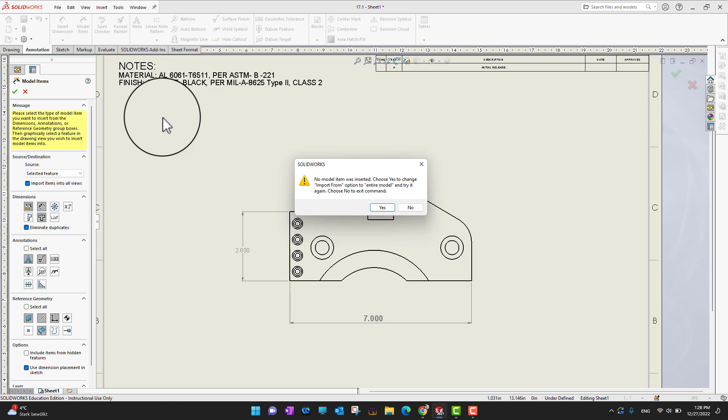Whatever you want to bring or import from the part, you just select it, right click, click the green check mark, and select OK. This way it's going to import all the stuff from the part to our drawing. But we don't need that, so I'm going to press undo.

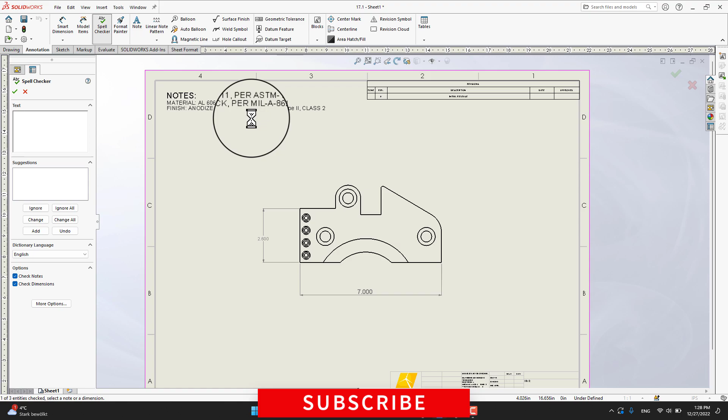The next option is spell check. This command is going to check all the spelling in our drawing. I'm going to select this, and it's going to highlight wherever there are spelling errors. Then I can just ignore all of them.

The next option is format painter. Before going to format painter, let me zoom in to show you. We have two different styles right now. If I like this format, I can select it and then impose that format onto the other dimension as well. So this is how we can use format painter.

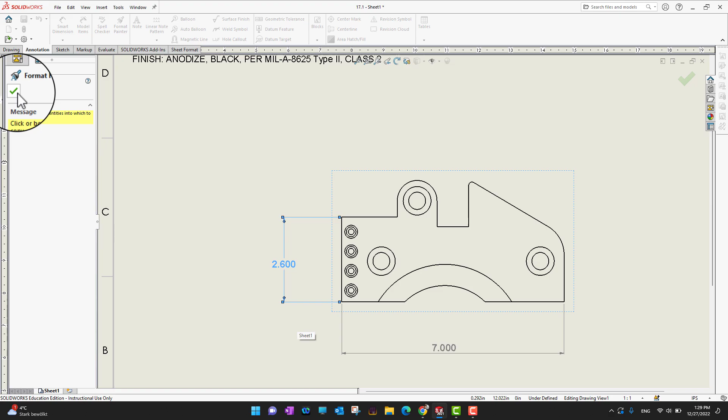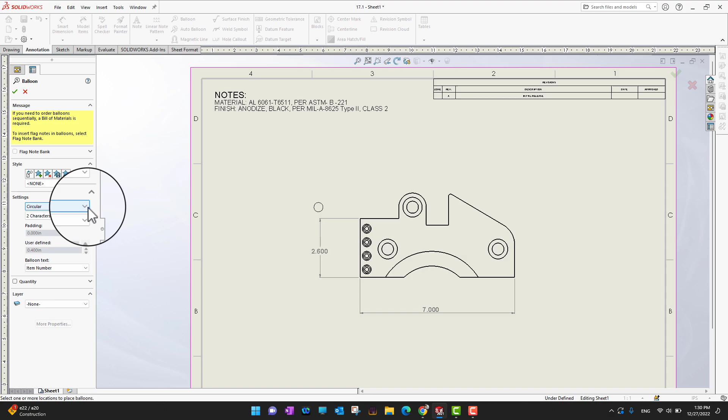The next option is balloons. Balloons are mostly used in the assembly. You can use different kinds of balloons - suppose you want to add a diamond balloon, pentagon, triangle, or hexagonal, and choose how much character and balloon text you want, item number or text, whatever.

So you can just add, and then what you can do is select any edge or wherever you want to add your balloons like this, and then I'm gonna click the green check mark.

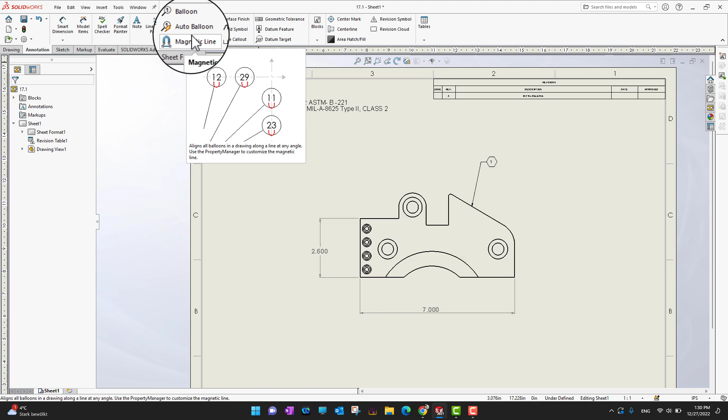Okay, then the next option is auto balloons. Again, this is used in multiple assemblies when you have a lot of parts. So the next option is magnetic line.

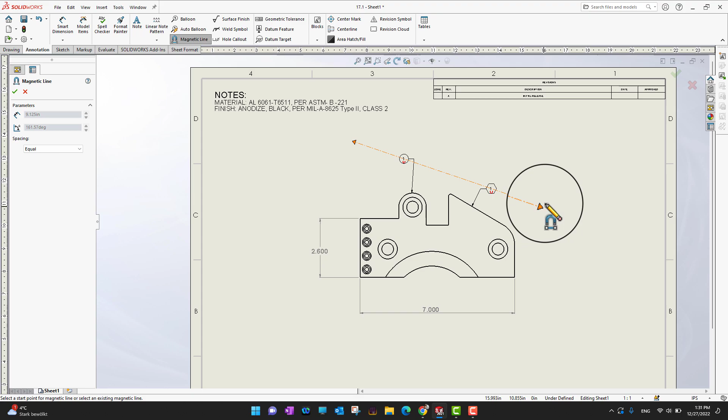Before going into the magnetic lines, I would like to have another balloon here, and then click the green check mark, and now go into the magnetic line. In the magnetic line, I can just draw a line from one point to anywhere, and when I bring it into the callouts or balloons, these balloons or callouts are going to attach with the magnetic line, and then I can control their direction or size wherever I want to insert, like this, and then click the green check mark.

Okay, so the next option is surface finish. If you want to explain different surface finish for your drawing, you can just add your symbols and add your angles or leaders or your surface dimensions, and then add wherever you want.

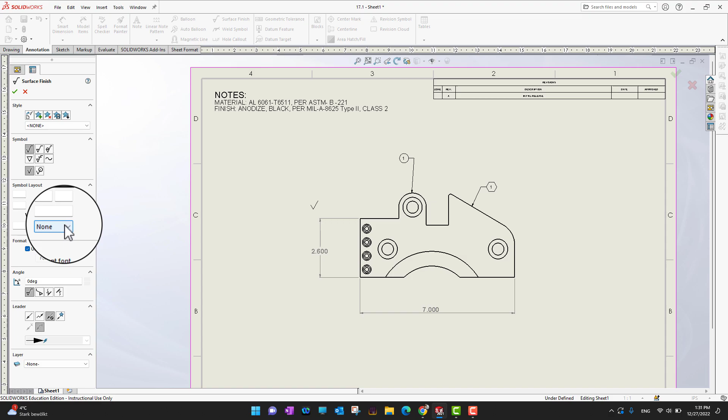So what you need to do is select whatever angle, how much finish you want, or what kind of symbol you want. You can select, and suppose I want to have this on the top surface, so I can just select this, and then click the green check mark. Okay, so the next option is weld symbol.

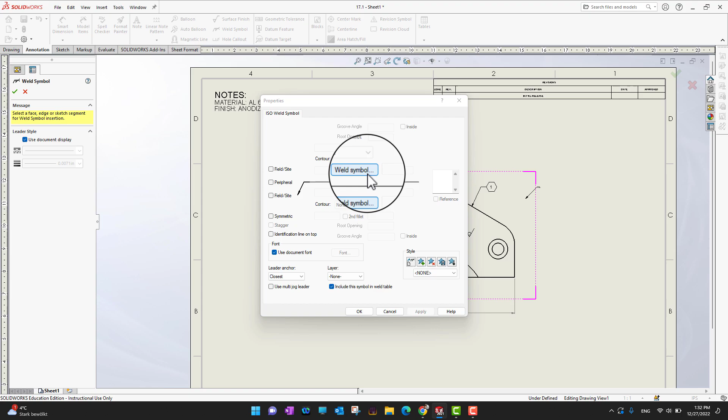If you have some welds in your drawing, you can see here we can choose our weld symbol. What kind of symbol do you want to use for your weld? Suppose I want to use this symbol. And if you want to change the font, you can change the font or whatever.

So wherever it is, suppose I want to have a weld here, I can just select a weld here, and then add a weld symbol into my drawing, and then press OK. Okay, so the next thing is a hole callout, which we already covered in previous videos.

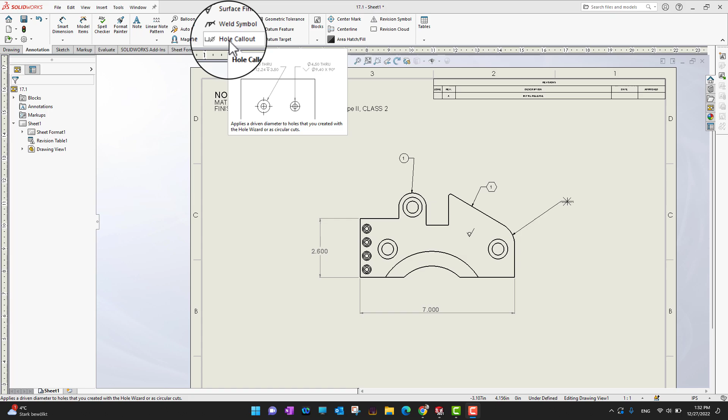So what we can do is press this hole and hole callout, and then wherever you want to give the dimension, you can just select your hole, and it's gonna bring all the information about the hole. So you can just add your hole callouts here like that.

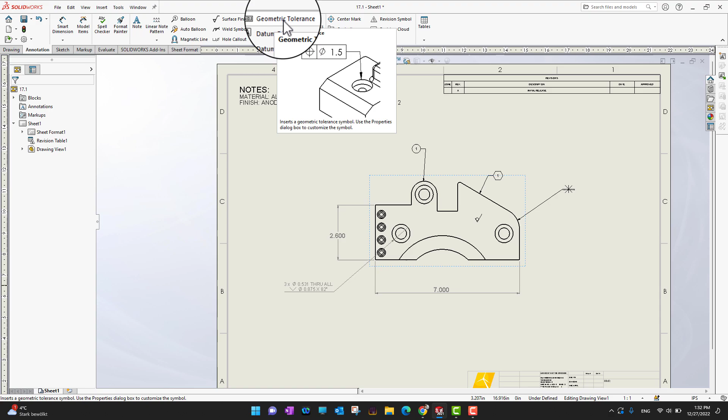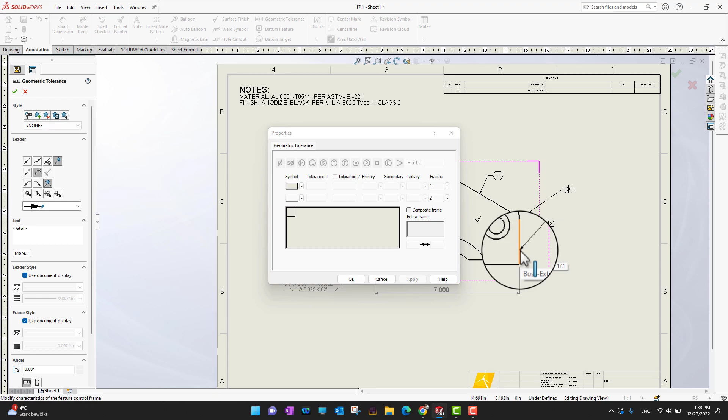Okay, so the next option is geometric tolerance. If you want to add some tolerance, you can go into the symbols, choose your symbols, or if you want to have tolerance 1, tolerance 2, you can select how much tolerance you have for some specific surface or from a specific edge. Then you can just mention your value, choose your symbol, and add your tolerance like that.

Okay, so the next option is datum feature. You can just select any face for datum. Suppose I want to select this face and mention it as a datum B, so I can mention it as a datum B. You can change the text, the symbol size and everything, and then click the green check mark. Okay, so the next one is datum target.

So datum target is mostly used in casting. If you want to use a target for your part, and you want to mention, say, create a center of this part as a target, you can just mention this is my target.

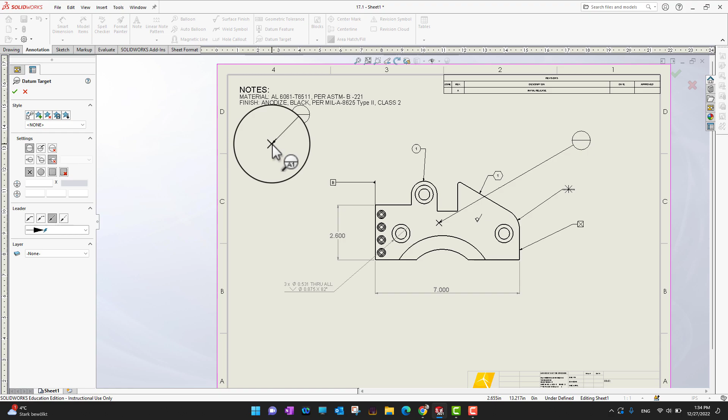So this is really helpful in the castings. If you want to go out of the command, you can press escape.

The next option is blocks. We already covered blocks in previous videos, like how we can make a block or insert our block. Blocks are used whenever you want to use a part, set of instructions, sketch, or part again and again without making it again. So you create a design once, convert that into a block, and then insert it anywhere, saving time so you don't need to design it again and again.

So if you have some blocks, you can bring them here and then mention them on your drawing.

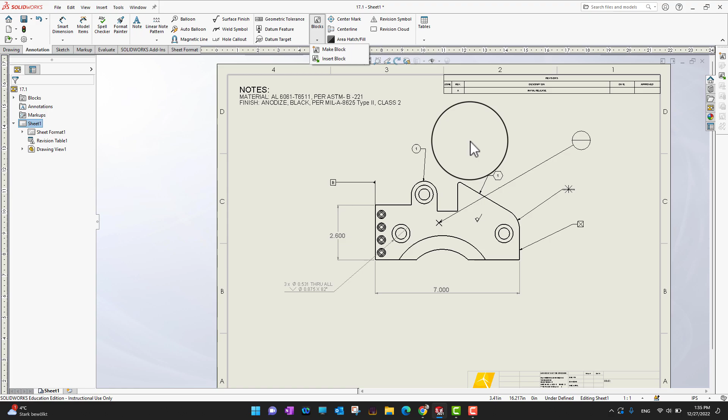The next option is center mark, which we already covered in a previous video. You go into center marks, and then press whatever circle you want to add a center mark to. You select the circle, and it adds a center mark into the circle, which helps you when you are creating dimensions.

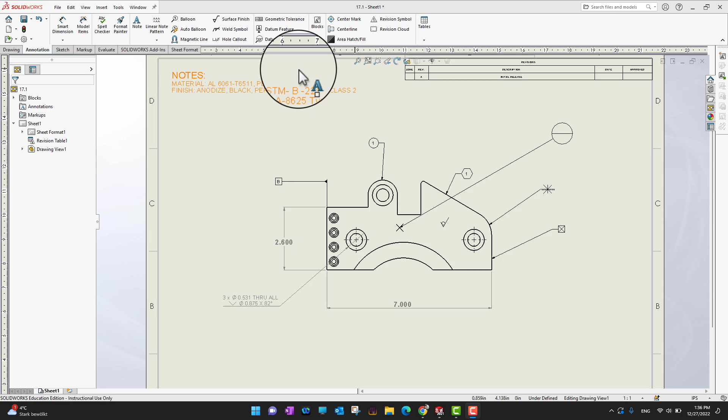The next option is center line. If you want to create a center line between any of two edges or faces, you select two lines, and it creates a center line between them. But it does not make sense here, so I'll go undo it.

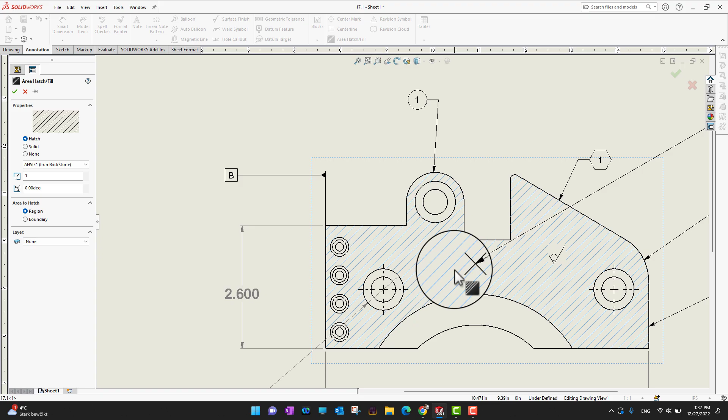The next option is area hatch or fill. If you want to fill or hatch a specific region, you can select solid or none, then select your scheme, and at what angle. If you want to use the area for the hatch as a region or boundary, you select your boundary, and it adds the hatch throughout the whole area or region wherever you want, then you click the green check mark.

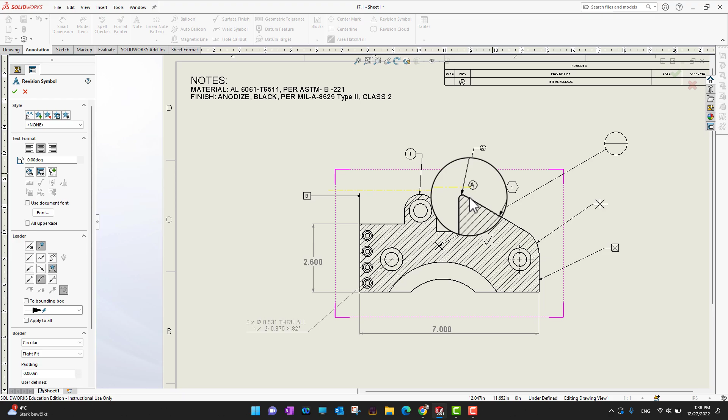The next option is revision symbol. If we want to add a revision, you can mention it, like this revision A. If I want to send it to the machine shop and mention the part where I want to add a revision, you go to that point, and into the notes, as in the revision table, you already mentioned A is the revision, so you can mention any point where you want to add your revision.

The next option is revision cloud. If you want to mention any area where you want a revision, you can add your cloud like this, and that makes it easier for the reader to see wherever you want to add your revisions.

The next option is table. You can bring your tables as well into the drawing, as we already covered in previous videos. So this was all about annotation.

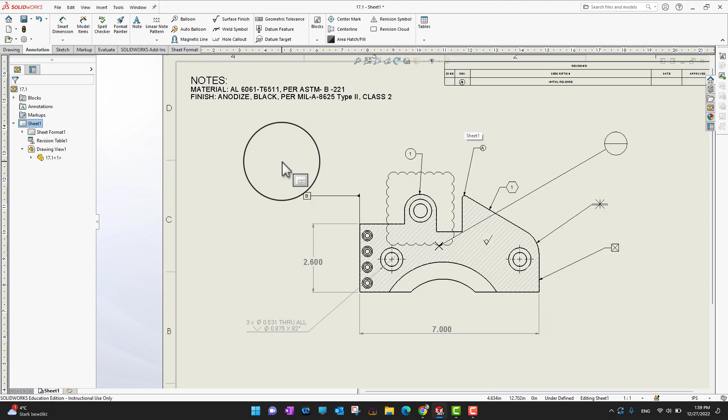I did not cover this in detail, but I just wanted to give you an overview, because you are not using all these symbols or annotations in every drawing in SolidWorks. So whenever you need it, you can just go and use it. And that's all for today's video.